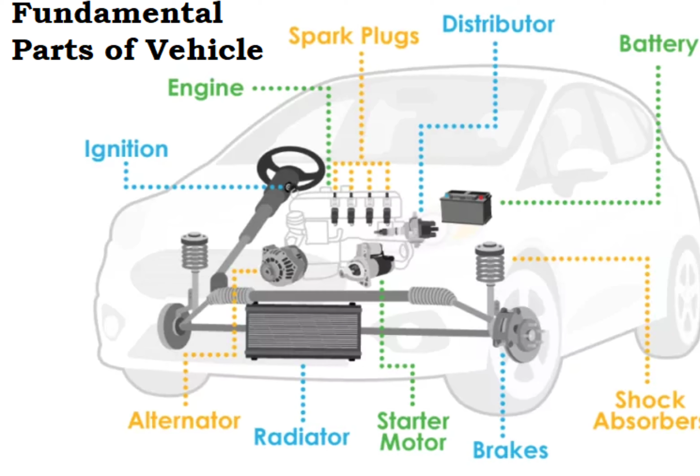In this video, I am going to discuss the major systems and components of an automobile. An automobile is made of several components, assemblies, and systems. The growing automotive industry has given rise to a growing auto components industry. It has emerged as a global outsourcing hub for manufacturing various automobile components. All major companies like Toyota, Hyundai, Ford, Volvo, Renault and others are now outsourcing their automotive components.

The auto components industry is predominantly divided into 5 segments. First, engine parts. Second, drive, transmission and steering parts. Third, suspension and brake parts. Fourth, electrical parts. Fifth, body and chassis.

Global automobile manufacturers use this as a manufacturing hub due to some reasons: low cost labor force and availability of raw material which makes it cost competitive, an established manufacturing base in the country, setting up of operations of major international auto component companies including Delphi, Visteon, Bosch, and Meritor in this particular country, setting up of international purchasing offices of automobile manufacturers and auto components manufacturers in the country, fine quality components manufactured in the country, and being a global hub for research and development, with companies like General Motors, Bosch, Johnson Controls, etc.

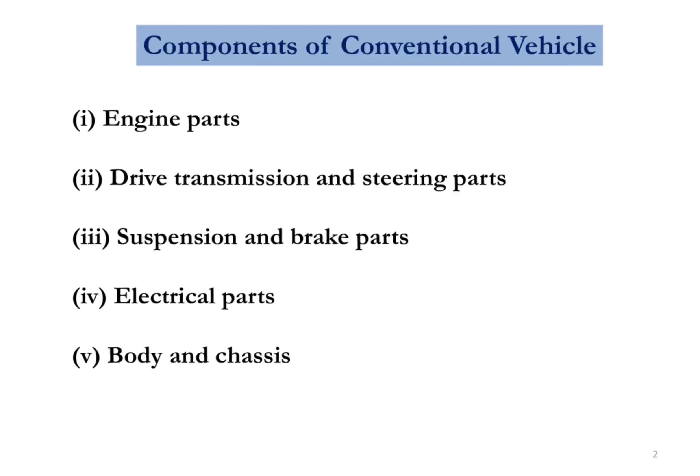Coming to the chassis and auto body. Chassis is a French term initially used to denote the frame or main structure of the vehicle. The chassis contains all major units necessary to propel the vehicle, guide its motion, stop it, and allow it to run smoothly over uneven surfaces. It is the main mounting for all components, including the body. It is also known as the carrying unit.

The chassis includes the following major components. First, a steel frame, which is a major part. Second, in case of a passenger vehicle, the whole body is also an integral part of the chassis. However, in commercial vehicles like trucks and buses, the body is not a part of the chassis. Therefore, a chassis is almost a complete vehicle except the body and other accessories which are not involved in the movement of the vehicle. Third, other major components include engine, transmission system, front and rear axle, steering system, suspension system, wheels, tires and brakes.

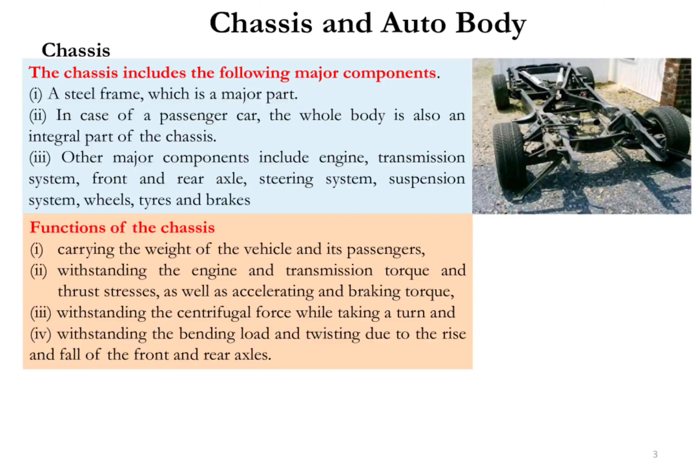Coming to the functions of the chassis: it includes carrying the weight of the vehicle and its passengers, withstanding the engine and transmission torque and thrust stresses as well as accelerating and braking torque, withstanding the centrifugal force while taking a turn, and withstanding the bending load and twisting due to the rise and fall of the front and rear axles.

Coming to the automobile body or superstructure. In case of integral frameless construction, the body is an integral part of the chassis, but in case of the conventional chassis, the body or superstructure is made after receiving the chassis from the manufacturer. The shape of the body depends upon the ultimate use for which the vehicle is meant.

The body of a vehicle is made of a sheet of metal or fiberglass so that passengers can sit in it. To make the journey comfortable, cushioned seats are provided. The body is provided on all sides with glass panes fixed to protect the passengers from dust and rain. The body of a vehicle is made of metal like steel section pillars with steel sheet paneling, steel section pillars with aluminum paneling, and all aluminum bodies, that is pillars, framework and paneling made of aluminum sections and sheets. This is because aluminum is very light in weight compared to steel.

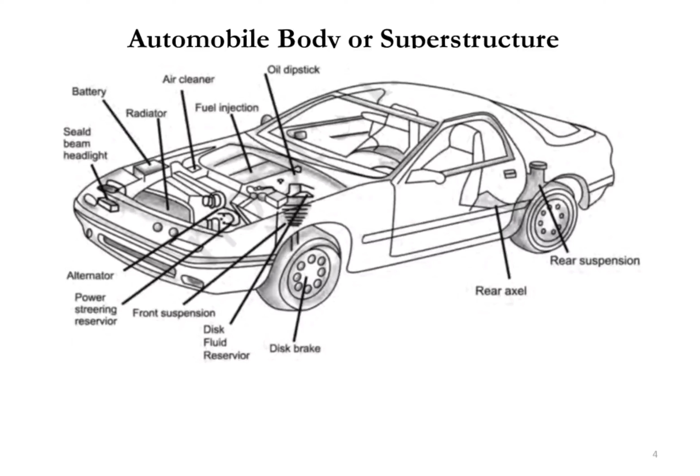The body is fixed to the chassis with the help of I or U bolts with rubber packing placed between the chassis and the body cross members. Coming to the requirements of the automobile body, the body of a motor vehicle should fulfill certain requirements.

It should be lightweight, with a minimum number of components. It should have long fatigue life and uniformly distributed load. It should have sufficient space for passengers and luggage.

It should have good access to the engine and suspension system, minimum vibrations when the vehicle is running, minimum resistance to air, and be cheap and easy to manufacture. It should have clear all-round vision through glass areas, and also have an attractive shape and color.

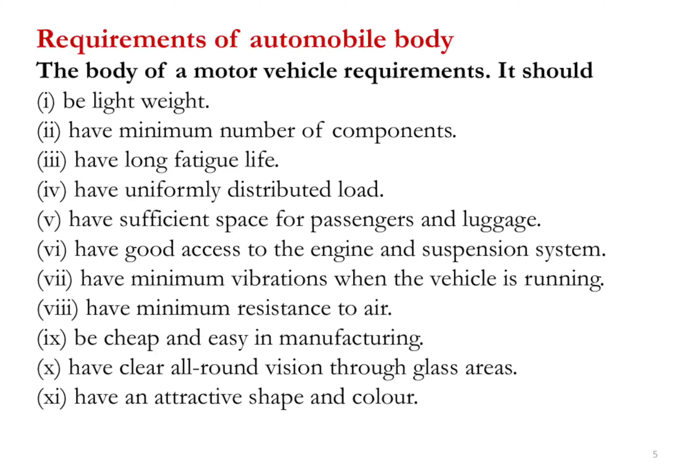Coming to the another part, engine and its components. An engine is a complex unit in which different components are assembled together and fuel is burned to produce power or energy. The engine converts chemical energy or heat energy into mechanical energy, which is then utilized for vehicular movement. There are different processes of fuel conversion.

When the fuel is burned within the engine, it is called an internal combustion engine, IC. And when it is burned externally and the produced steam is used for mechanical movement, it is called an external combustion engine, EC.

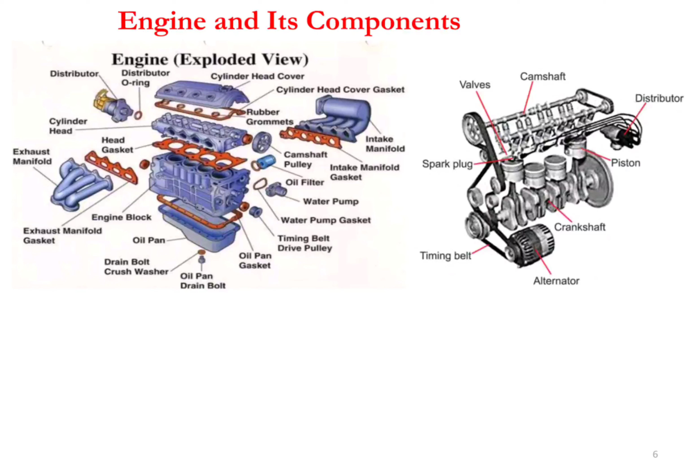Nowadays, automobile engines are quite economical due to the developments taking place in the field of internal combustion engine. On the basis of process of ignition, automobile engines are classified into spark ignition engine, petrol or gas, and compression ignition, diesel.

In an IC engine, the reciprocating motion of the piston is converted into rotary motion of the crankshaft, and the produced power is then transmitted to move the vehicle. In case of a rotary engine, the rotor rotates and completes the process of combustion and produces the power which helps the vehicular movement.

The spark ignition engine can be differentiated from the compression ignition engine as per these factors: first, the type of fuel used; second, the way the fuel enters the combustion chamber; third, the way in which the fuel is ignited.

Coming to the spark ignition engine, petrol or gas engine. The spark ignition engine uses a highly volatile fuel such as gasoline, which turns into vapor easily. The fuel is mixed with air before it enters the combustion chamber and forms a combustible air fuel mixture. This mixture then enters the cylinder and gets compressed with the help of the piston.

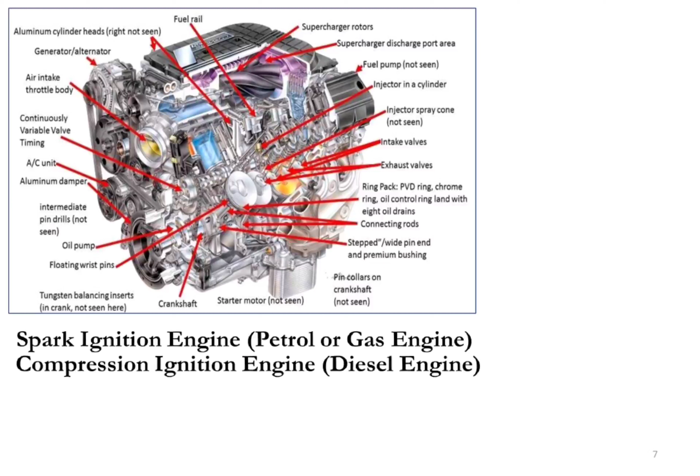The diesel is then injected or sprayed into the engine combustion chamber. This spray contains very fine and tiny particles of the diesel in an atomized form. The hot air or heat of compression ignites the fuel and generates the power stroke.

Coming to the components of an IC engine. First component, cylinder. The cylinder or cylinder liner of an IC engine is fitted in the cylinder block, which is a single cast unit and is considered to be the main body of an engine. The block has cylinder liners.

The piston reciprocates up and down from top dead center, TDC, to bottom dead center, BDC, to generate power. The cylinder liner and the cylinder block have to withstand very high pressure, about 70 bar, and temperature about 700 degrees centigrade during the power stroke.

The material used for the cylinder block must withstand such heat and also disperse it effectively. The cylinder block is well designed with water passages to remove the excess heat, and separate oil passages are provided for the circulation of the lubricating oil.

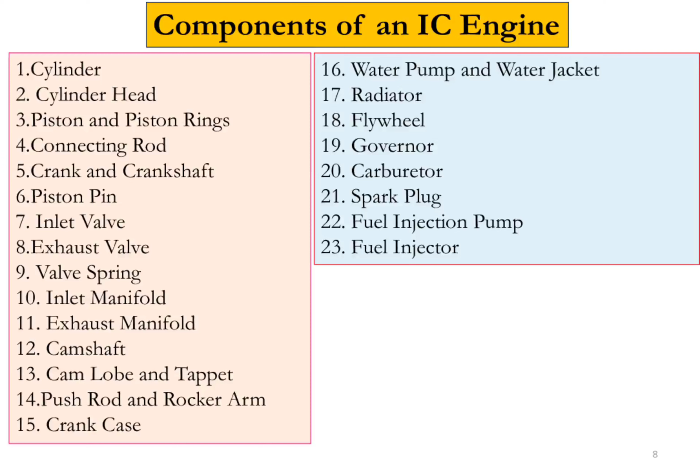Coming to another component, the lubrication system. As you know, our body requires fluids like water and also oil in the form of fats like ghee, butter, and cooking oil for maintenance of our system. Similarly, lubrication is required for maintenance of an engine. The lubrication system is one of the most important parts of an engine. The engine cannot run smoothly for more than a few minutes without lubricating oil.

Whenever two metallic surfaces move over each other under direct contact, dry or solid friction is produced. This is due to the irregularities on the two surfaces interlocking each other. The dry friction thus created produces a lot of heat and results in wear and tear of the metal surfaces.

Coming to the objectives of lubrication, the main objectives are to reduce friction between moving parts to its minimum value so that power loss is minimized, and to reduce wear and tear of the moving parts as much as possible.

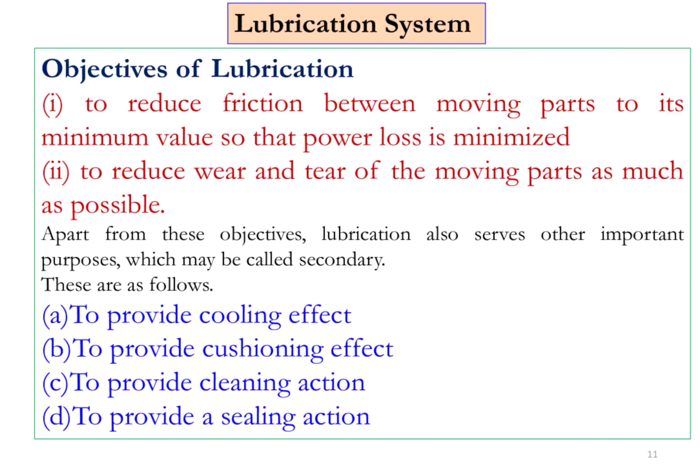Now coming to the cooling system. Like our body requires air and water for cooling, similarly the engine of a vehicle also requires cooling.

The cooling system has three main functions: first, it removes excess heat from the engine. Second, it maintains a constant engine operating temperature. Third, it increases the temperature of a cold engine as quickly as possible by maintaining the thermostat valve in a closed position, which is fitted in the path of coolant circulation.

What is the necessity of cooling? The cylinders of internal combustion engines require cooling because the engine cannot convert all the heat energy released by combustion into useful work. Liquid cooling is employed in most engines, whether used in automobiles or elsewhere. The water or coolant is circulated around the cylinders to pick up the heat and then dissipate it through the radiator.

As the temperature increases from 71 to 82 degrees centigrade, the thermostat valve opens and sends the water to the radiator to radiate the heat. When the temperature rises above 82 degrees, the thermostat switch operates the cooling fan to support the cooling process in the radiator.

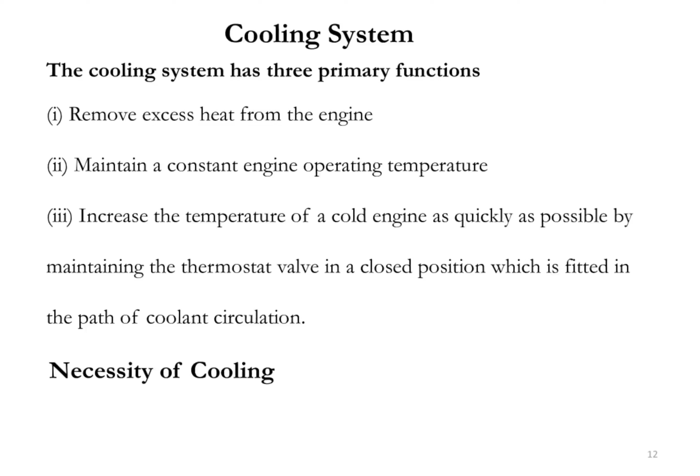Coming to the next component, the fuel supply system. In petrol engines, the fuel and air mixture is supplied to the combustion chamber of the engine. The mixture is atomized and then vaporized by the carburetor, and then ignited by the spark plug. Fuels such as petrol, benzol, and alcohol are used in an SI engine nowadays.

Fuel is injected into the flow of air at a certain temperature and pressure, so the fuel vaporizes faster and the combustion process is better with low emission.

It also shows better fuel efficiency. In case of compression ignition engine (diesel), the fuel is sent through the fuel pump to the injector, and the injector sprays the fuel at the end of the compression stroke.

The oil fuels used in CI engines do not vaporize easily. Therefore, a separate injection system is used consisting of fuel injection pump (FIP) and injectors. These injectors atomize the fuel and it is then sent for combustion. Nowadays, in compression ignition engines, common rail direct injection system is used for better engine performance.

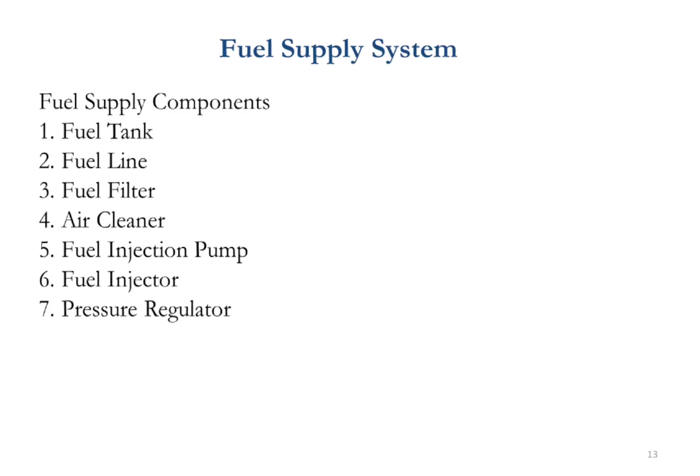The fuel system is controlled by the ECM. Coming to the next component, pressure regulator. It controls the amount of pressure that enters the injector. The excess fuel is sent back to the fuel tank.

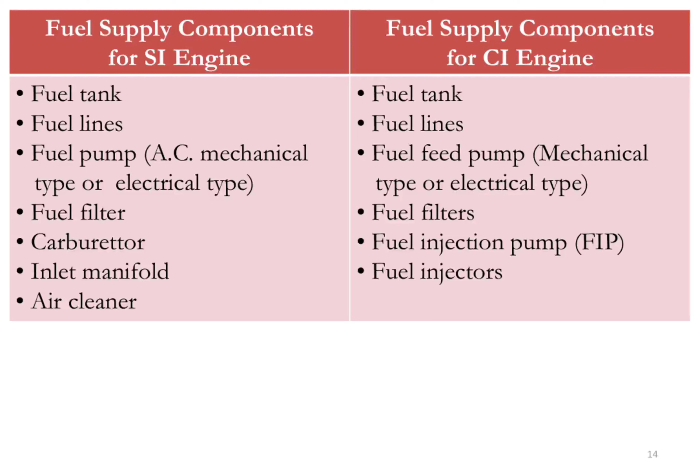Now this slide shows the comparison between fuel supply components for SI engine and fuel supply components for CI engine. For SI engines: fuel tank, fuel lines, fuel pump, fuel filter, carburetor, inlet manifold, air cleaner. But in CI engine: fuel tank, fuel lines, fuel feed pump, fuel filters, fuel injection pump and fuel injectors. This is the comparison table between the SI engine and CI engines.

Coming to another component, transmission system. Transmission system is used in motor vehicles to supply the output of the internal combustion engine to drive the wheels. The transmission reduces the higher engine speed to the lower wheel speed, increasing the torque in the process. Transmissions are also used to pedal bicycles, fixed mechanisms, and wherever rotational speed and torque need to be adapted.

Coming to the transmission system, it consists mainly of the components: clutch assembly, gearbox assembly, and propeller shaft. Coming to the clutch assembly, the clutch is a mechanism which enables the rotary motion of one shaft to be transmitted when desired. The axis of the driving shaft and driven shaft are coincident.

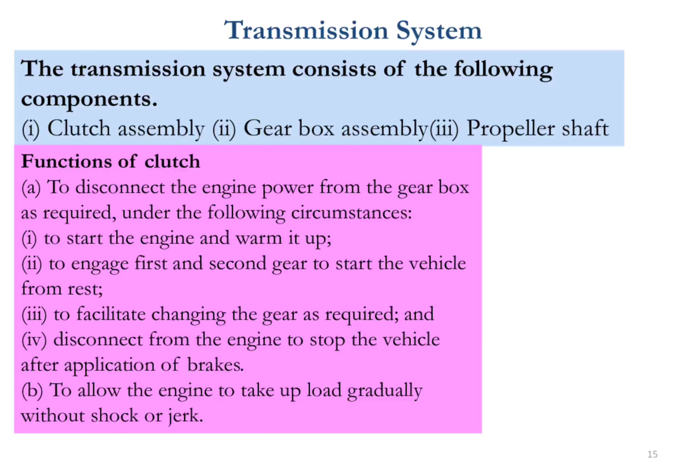Now coming to the functions of the clutch: to disconnect the engine power from the gearbox as required under the following circumstances - to start the engine and warm it up, to engage the first and second gear to start the vehicle from rest, to facilitate changing the gear as required. Another function is to disconnect from the engine to stop the vehicle after application of brakes, and to allow the engine to take up load gradually without shock or jerk.

What are the requirements of the clutch? The clutch should meet the following requirements: torque transmission, or ability to transmit maximum torque of the engine; gradual engagement, that is to engage gradually and avoid sudden jerks; heat dissipation; dynamic balancing; vibration damping.

Size - the clutch should be as small as possible so that it occupies minimum space. Free pedal play, which helps the clutch to reduce the effective load on the carbon thrust bearing and its wear. Easy in operation, requiring as little exertion as possible on the part of the driver. Lightweight of the driven member of the clutch, so that it does not continue to rotate for any length of time.

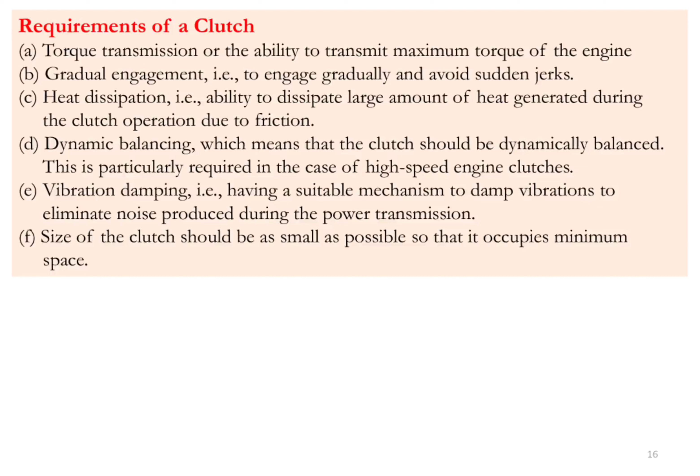What are the main parts of the clutch? The main parts of the clutch are divided into three groups. First, driving members. Driving members consist of a flywheel mounted on the engine crankshaft. The flywheel is bolted to a cover which carries a pressure plate or driving disc, pressure springs and releasing levers. Thus the entire assembly of the flywheel and the cover rotate all the time. The clutch housing and cover provided with openings dissipate the heat generated by friction during clutch operation.

Next is driven members. The driven members consist of a disc or plate called the clutch plate. It is free to slide lengthwise on the splines of the clutch shaft. It carries friction material on both of its surfaces. When it is gripped between the flywheel and the pressure plate, it rotates the clutch shaft through the splines.

Next are the operating members. The operating members consist of a foot pedal, linkages, releasing bearing, release levers, and springs.

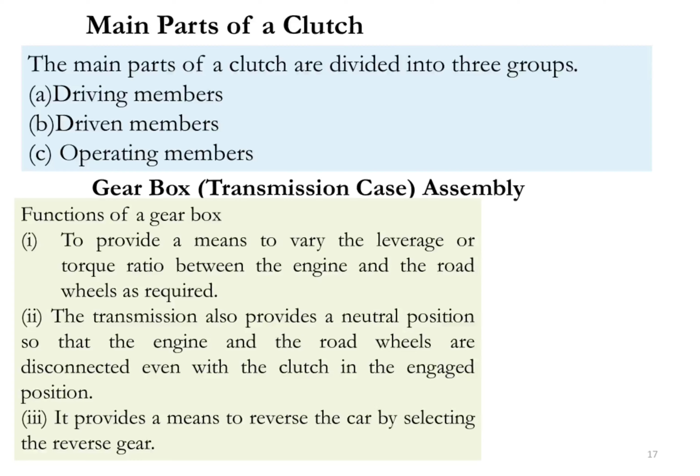Next component is the front and rear axle. Here I am going to discuss the axle and steering system which transmits the power to the wheel. It plays a crucial role in the movement of the vehicle.

Propeller shaft: this is a shaft which transmits power from the engine to the wheels of a motor vehicle. It is a hollow tubular shaft and consists of mainly three parts: shaft, universal joints, and slip joint. Coming to the shaft, it mainly bears the torsional stress produced due to twisting, and it is generally made of tubular cross section.

Next, universal joint: one or two universal joints are used depending on the type of rear axle drive used. The universal joints help in the up and down movement of the rear axle when the vehicle is in running condition. Next is the slip joint: depending on the type of drive, one slip joint may be there in the shaft, which serves to adjust the length of the propeller shaft as demanded by the rear axle movement.

Next is the front and rear axle. The front axle carries the weight of the front portion of the automobile, as well as facilitating steering and controlling the rolling of wheels. It also absorbs road shocks arising due to road surface variations.

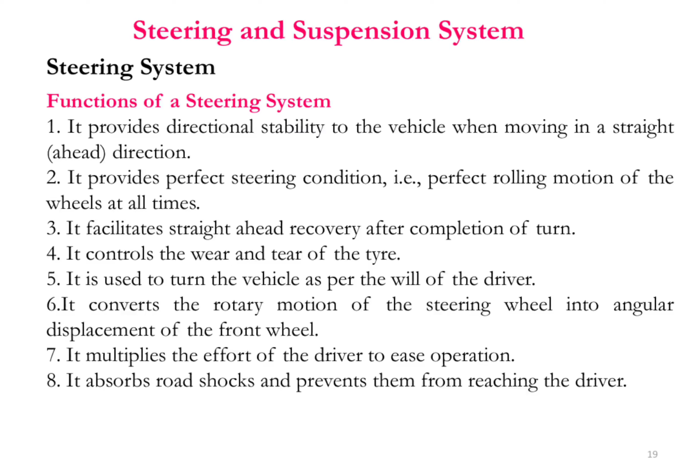In case of a commercial vehicle, the front axles are generally dead axles. The front axle is designed to transmit the weight of the automobile from the springs to the front wheels, turning right or left as required. To prevent interference due to the front engine location, and for providing greater stability and safety at high speeds by lowering the center of gravity of the vehicle, the front axle includes the axle beam, sub-axles with the brake assemblies. It is made of drop-forged alloy steel consisting of 0.4% carbon steel and 1.3% nickel steel.

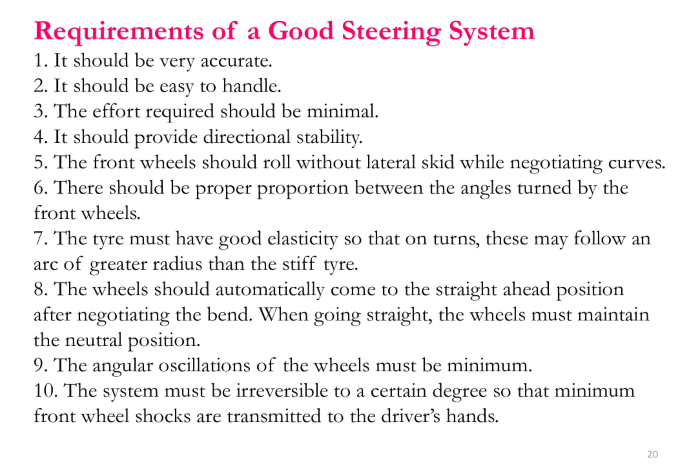The main beam axle is connected to the stub axle with the kingpin. The front road wheels are mounted on the stub axles.

Next, coming to the rear axle. Like the front axle, the rear axle is also made up of dropped forged steel. It enables the transmission of driving and braking torque to the chassis, frame and body of the vehicle. It also bears the side thrust on the vehicle.

Now coming to the steering system. The steering mechanism permits the driver to control the vehicle on a straight road and turn right or left as desired. The steering mechanism includes a steering wheel which the driver controls, a steering gear which converts the rotary motion of the steering wheel into straight line motion, and steering linkages.

In modern vehicles, the manually operated steering system is assisted by power and is called power steering. Electric power drawn from the battery or hydraulic power is used.

The functions of the steering system are: it provides directional stability to the vehicle when moving in a straight direction. It provides perfect steering condition, that is, perfect rolling motion of the wheels at all times. It facilitates straight ahead recovery after completion of the turn.

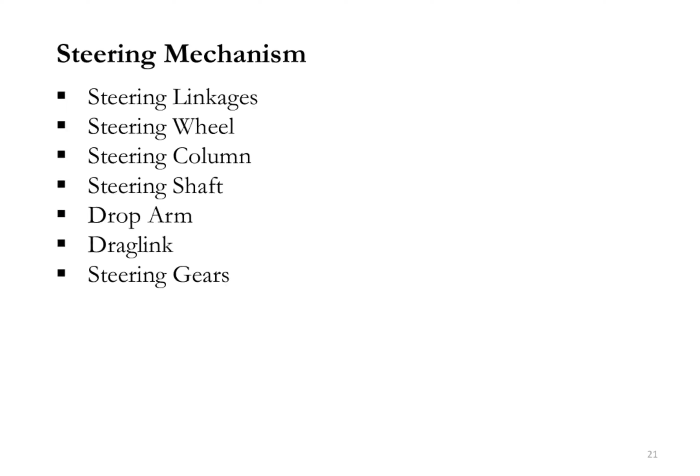Coming to the steering mechanism, for perfect steering it must always have an instantaneous center about which all the wheels rotate. To achieve this, the inner wheel has to turn more than the outer wheel. Two types of mechanisms are available: the Davis and the Ackermann steering mechanism.

Out of these, the Ackermann type is more popularly used because of its simplicity. It also lessens tire wear and lowers friction. Steering linkages: a steering linkage is the part of an automobile steering system that connects to the front wheels.

In a commercial vehicle, a rigid axle type front suspension system is used. Steering wheel: it is made of polythene or hard plastic and consists of a circular rim with a hub at the center. Other components include the steering column, steering shaft, drop arm, and drag links.

Steering gears. Coming to the suspension system, the suspension is the term given to the system of springs, shock absorbers and linkages that connects the vehicle to its wheels. The suspension system serves a dual purpose: contributing to the vehicle's road holding, handling and braking for safety and driving comfort, and keeping the vehicle occupants comfortable and reasonably well isolated from road noise, bumps and vibrations.

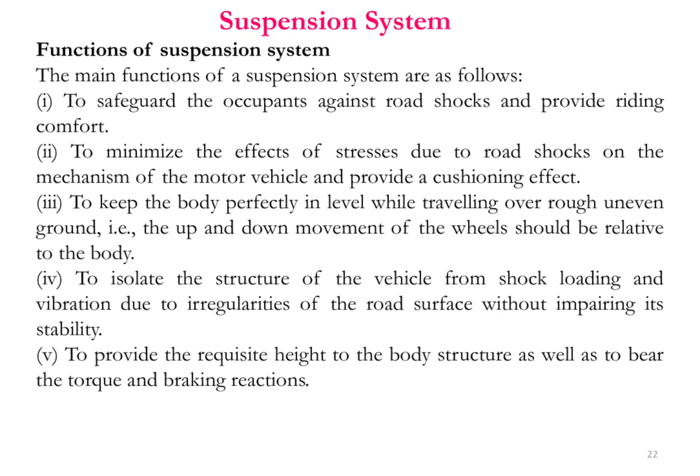Coming to the various components of the suspension system, these can be categorized as mechanical suspension system, hydraulic suspension system, and air suspension system. The mechanical suspension systems are subclassified as leaf springs, coil springs, rubber springs, and torsion bars. The hydraulic suspension is subclassified into hydraulic shock absorbers and telescopic fork absorbers.

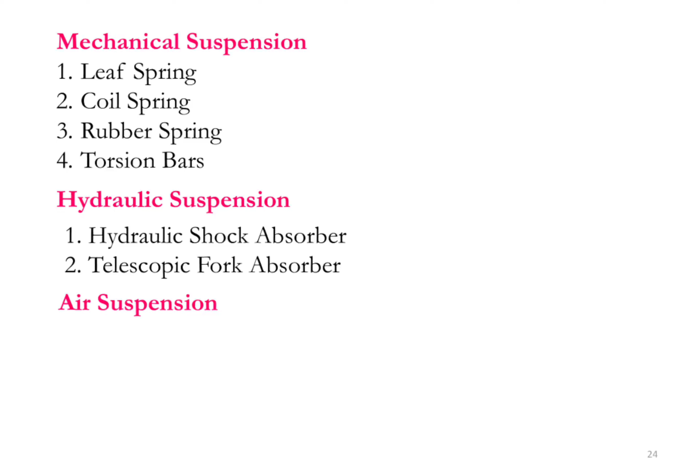Now coming to another component: the wheel. The wheel is an important component of a vehicle. The wheel of a four-wheeler vehicle is mounted on a hub and consists of parts like rim, tire and tube. The wheels not only support the weight of the vehicle but also protect it from road shocks. All four wheels must resist braking stresses and withstand side thrust. A wheel should be light and easily removable.

What are the functions of the wheel? The functions of the wheels are: to withstand the weight of the vehicle, to absorb road shocks, to grip the road surface, and to balance dynamically.

Another component is the rim. The rim is the outer edge of the wheel holding the tire. It makes up the outer circular design of the wheel on which the inside edge of the tire is mounted. On vehicles, the rim is a large hoop attached to the outer ends of the spokes of the wheel and holds the tire or the tube. Different types of wheel rims are: disc wheel rim, wire spoke wheel rim, split wheel rim, and heavy vehicle wheel rim.

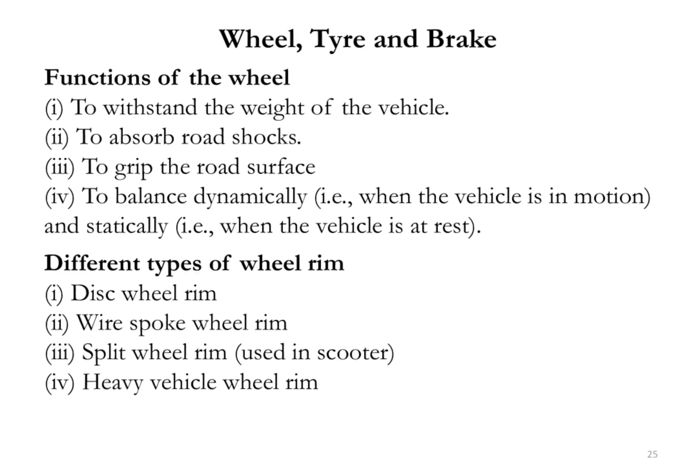Next is the tires. The tire is mounted on the wheel rim. It carries the vehicle load and provides the cushioning effect. It must produce minimum noise while the wheel turns on the road. It resists the tendency for the vehicle to oversteer. It should have good grip while accelerating and braking the vehicle on both dry and wet roads.

What are the desirable properties of the tires? A tire must have the desired properties: non-skidding, uniform wear, load carrying, cushioning, power consumption, noise, and balance.

Coming to the functions of the tire: to carry the load of the vehicle, to absorb minor road shocks, to reduce vibration to some extent, to transmit power from the engine through gearbox, propeller shaft, and rear axle to the ground with which the vehicle moves. The treads made on the tires grip the road for better traction. Types of tires: solid tire, tube tire, tubeless tires.

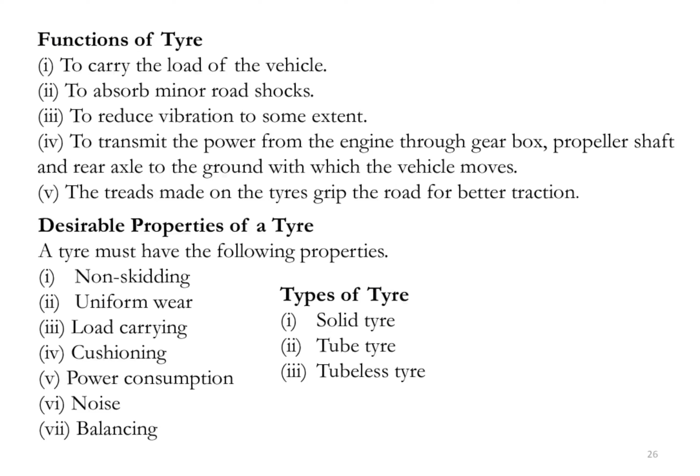Now, coming to the brakes. Brakes are one of the most important control components of the vehicle. They are required to stop the vehicle within the smallest possible distance, and this is done by converting the kinetic energy of the wheel into heat energy which is dissipated into the atmosphere.

The requirements of a good braking system are: to stop the vehicle in the shortest possible distance and time, to control the vehicle speed while moving on plain roads and hills, to work equally well on fair and bad roads, to ensure the pedal effort applied by the driver is not much, reducing inconvenience for the driver, to work efficiently in all weathers, to have very few wearing parts, to require little maintenance. Brakes when applied should not disturb the steering geometry, and there should be minimum sound when the brake is applied.

Coming to the types of brakes: foot brake, hand brake, drum brake or internal expanding brakes, disc brake or external contracting brakes, mechanical brake, power brake, vacuum brake, air brake, hydraulic brakes, anti-lock braking system, and electric brake.

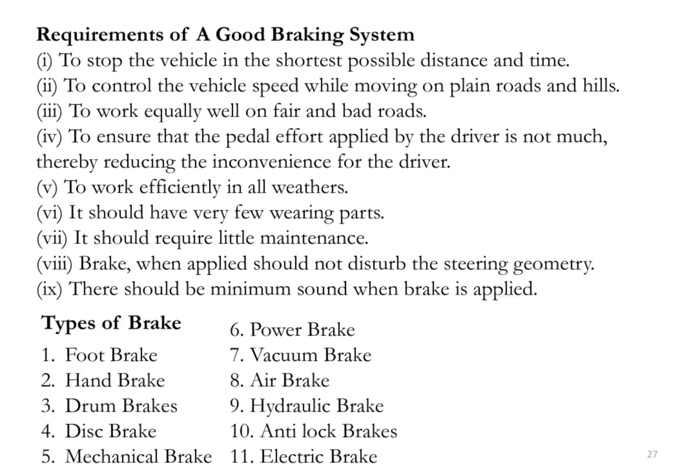Now here is electrical or electronic systems. Nowadays, all automobiles run with the help of electrical and electronic systems, and therefore it plays an important part in the functioning of the automobile. The electrical and electronic system consists of the starting system, ignition system, generating or charging system, lighting system, and connections for other accessories. The main components of the electrical system are: starting system, generating system, charging system, ignition system, lighting system, and accessories, along with the functions of each.

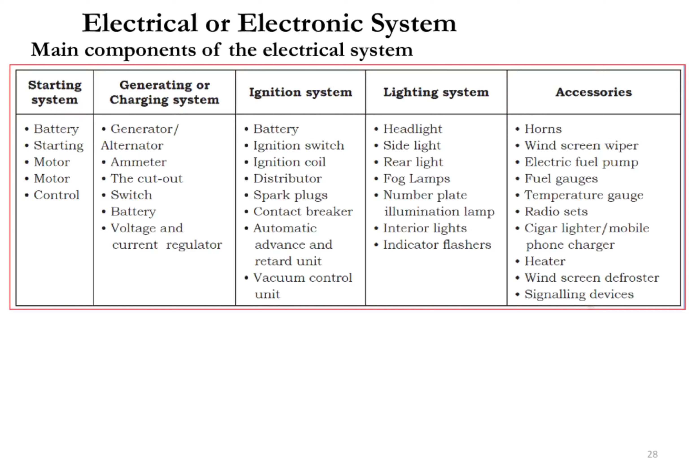Air conditioning systems. During summer, an automobile requires considerable refrigerating capacity to maintain cool and comfortable conditions in the sitting space. Similarly, when moving on cold days in winter, the same vehicle requires considerable heat capacity to keep it warm and comfortable for the passengers.

The different components of the automobile air conditioning system are: compressor, magnetic clutch, condenser, receiver dryer, expansion valve, evaporator, and throttling valve.